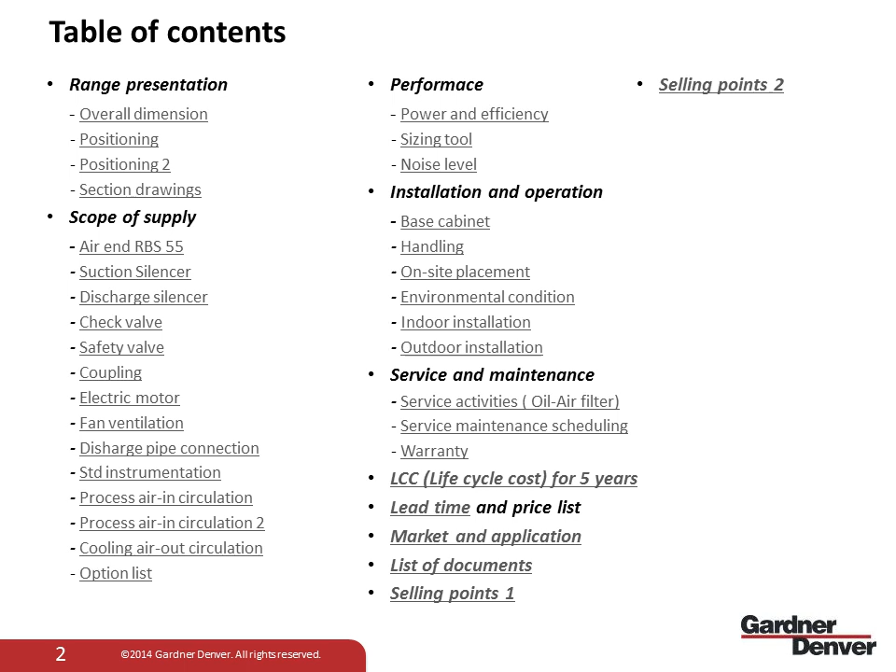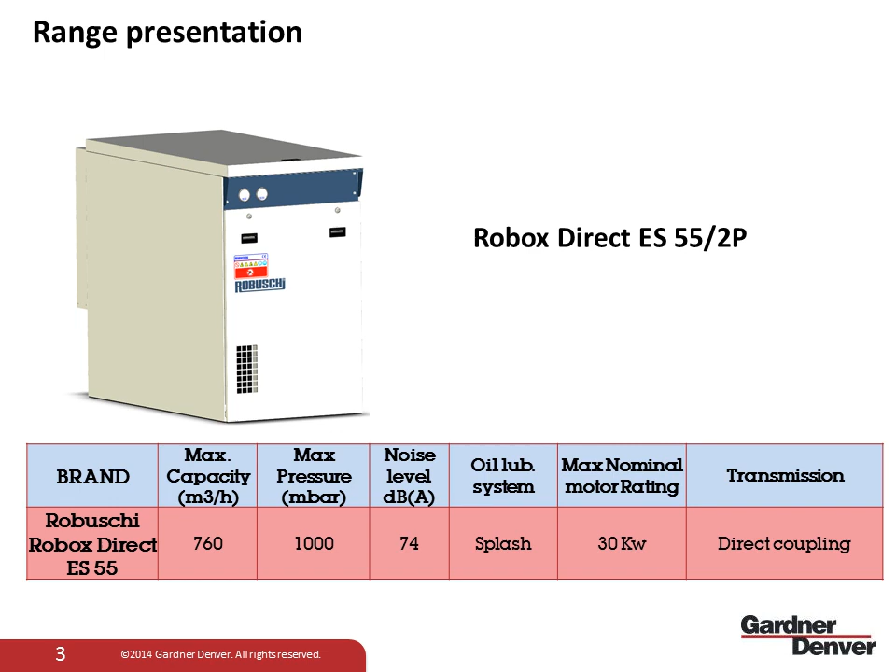First of all, the first slide shows the main key performance values of this product. We have one size, RBS 55, and you can see that the maximum capacity reachable is 760 cubic meters per hour at 1 bar maximum delta pressure. And the main differentiation compared to the standard lobe product is obviously the transmission, that in this case is direct coupling against the belt transmission.

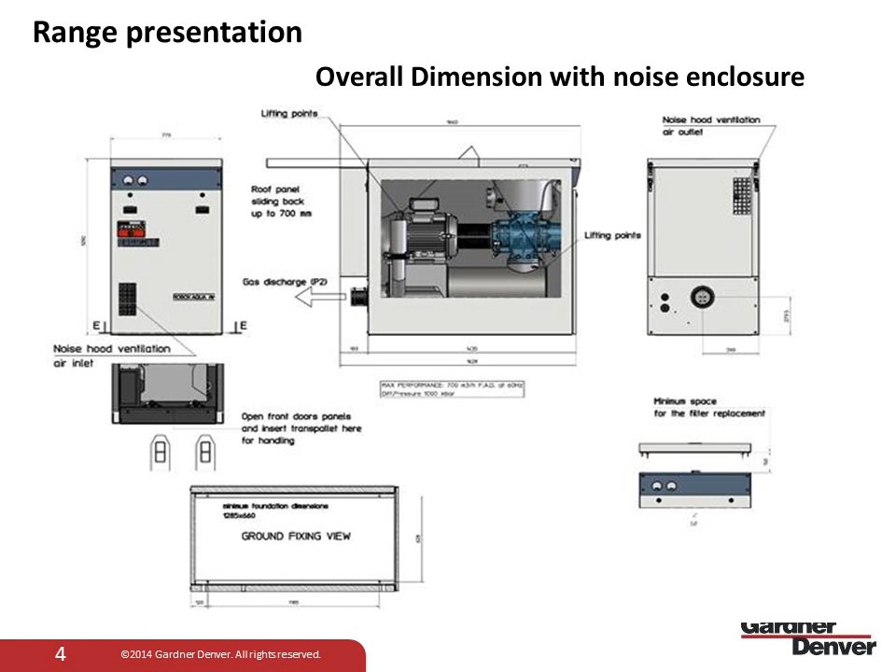This slide shows the complete info regarding the dimensions, including particular values, for example the minimum space for the filter replacement that you can see in this part of the slide, which we will see in detail later. But just to give you an overall dimension with noise enclosure. Same speech as the previous slide, but without noise enclosure. So you can see that this product is also available without noise enclosure.

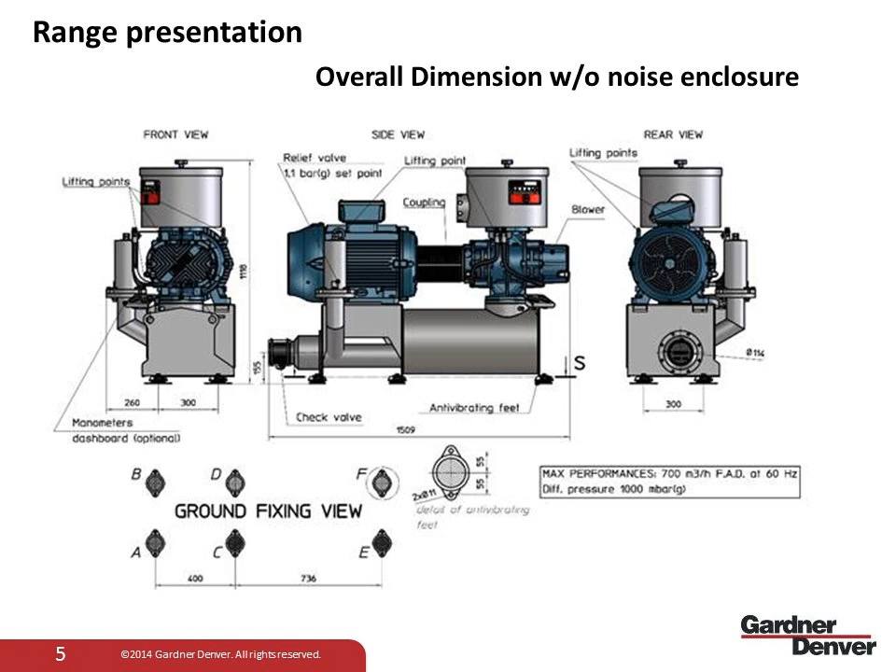Positioning. This is one of the main aspects on which we have focused and concentrated. So the footprint reduction, in order to give the customer more flexibility during installation, without removing positive aspects like the side-by-side installation, which is still one of the important features of this product. Said that, you can see also in the image in the slide that 4 Robox Direct units can fit the same space that we have with the standard Robuschi lobe, but with more capacity.

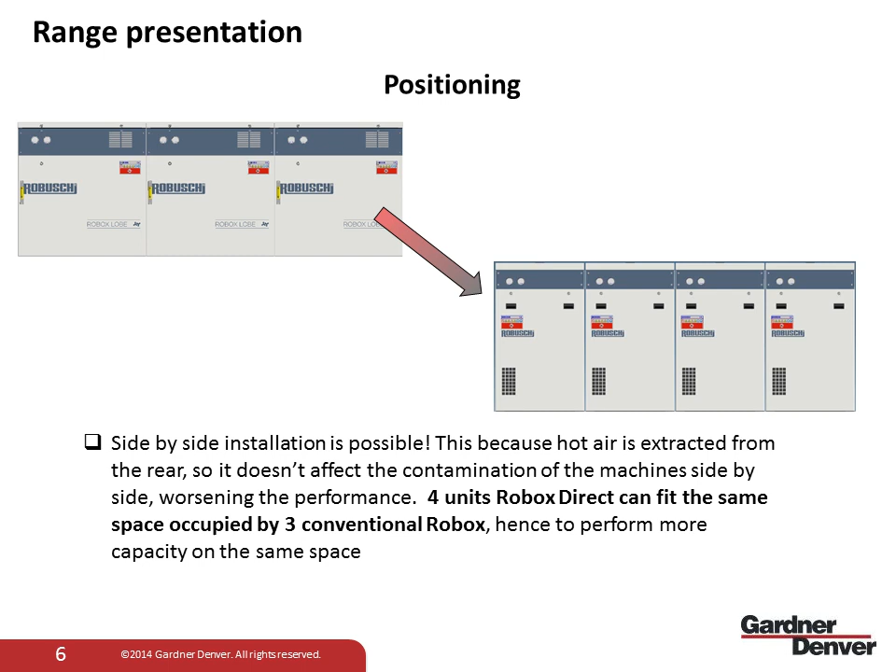Another important feature, in combination with what was said in the previous slide, is that thanks to the addition of the soundproofed base, which is an integral part of the machine, so it's in the standard scope of supply, this allows flexibility, such as the possibility of installation on upper levels. In this way, we can reduce the space requirement and consequently the compressor room size.

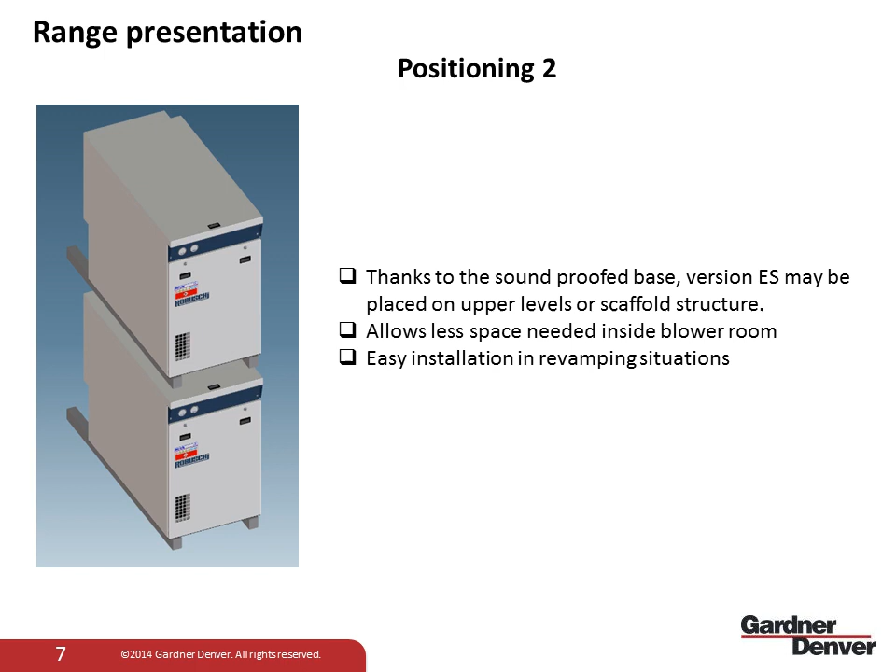Another slide, just to give you an overall view of the product, specifying the main parts of the noise enclosure. So there is a list of the total parts that compose the noise enclosure: the total panels, the front panels, the base, that is number one, etc.

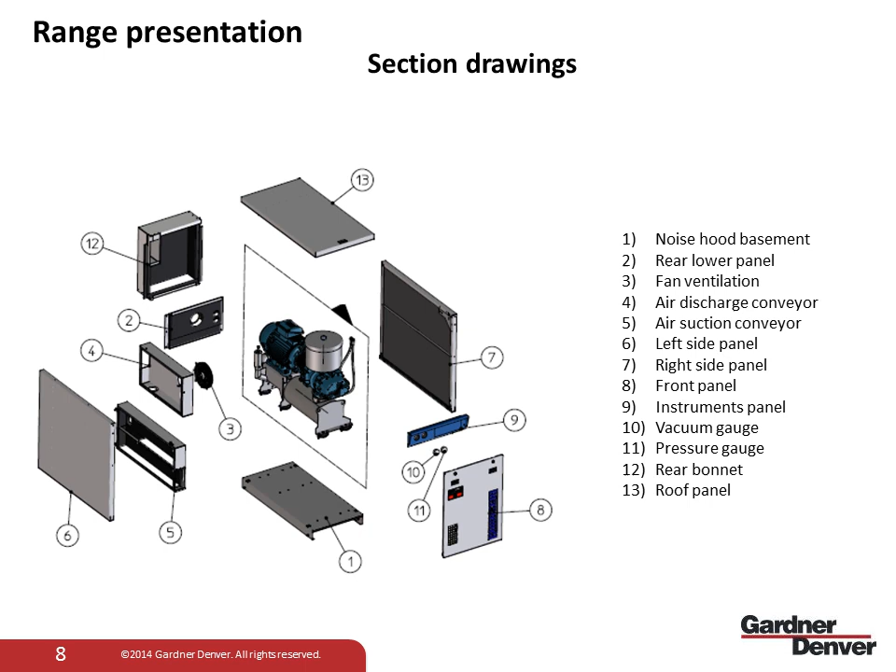Moving to the scope of supply, we start obviously from the air end, RBS 55. I guess that every one of you knows very well the Robuschi bare shaft, and for this reason, in the slide there is just listed a summary of the main features of this range, with the addition of one very important new entry in terms of features, that is the oil-free certification. Now we have the certification for all the Robuschi bare shaft range.

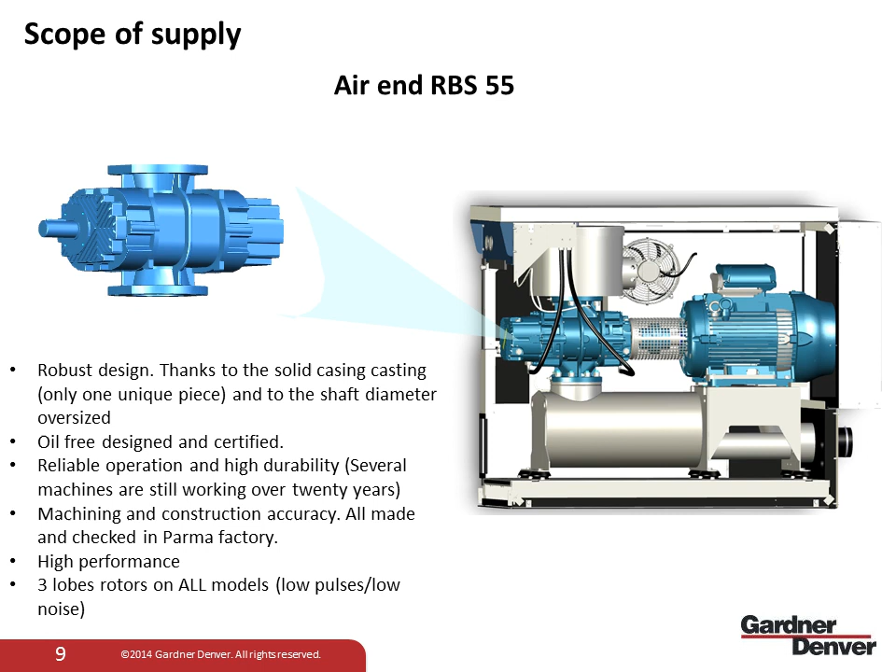About the suction silencer, we reused the same SPF that we used in the standard package due to the double function that this silencer gives, so the absorptive function and the reactive function. The reactive function is also patented, and ensures good noise reduction and filtration to avoid pollution in the blower. 93% efficiency on particles of 10 micron.

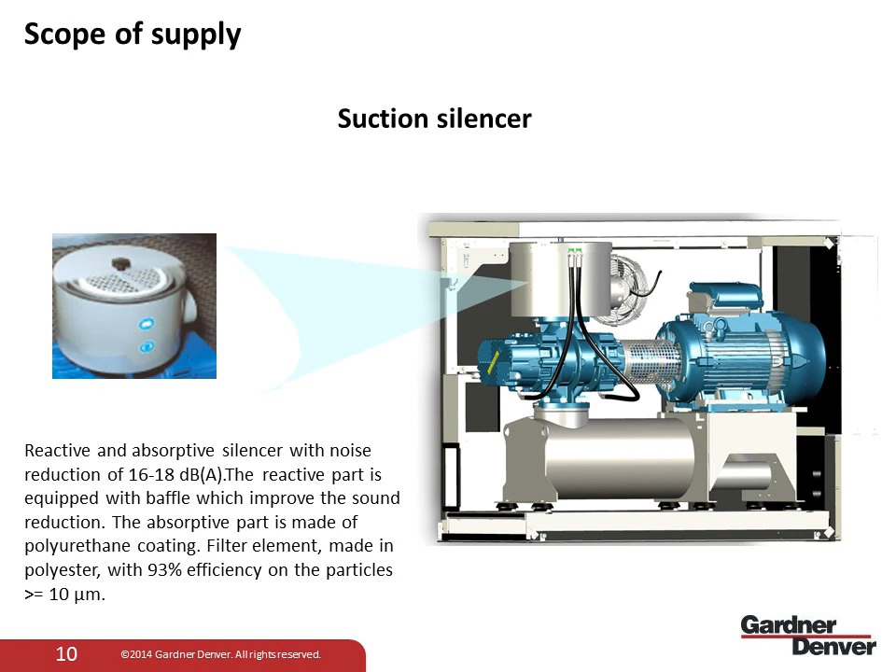Same speech about the discharge silencer. Also in this case, we have the same discharge silencer, which is only reactive. So thanks to the 3 resonance chambers with different volumes that we can see in the picture, this ensures a good attenuation of the noise.

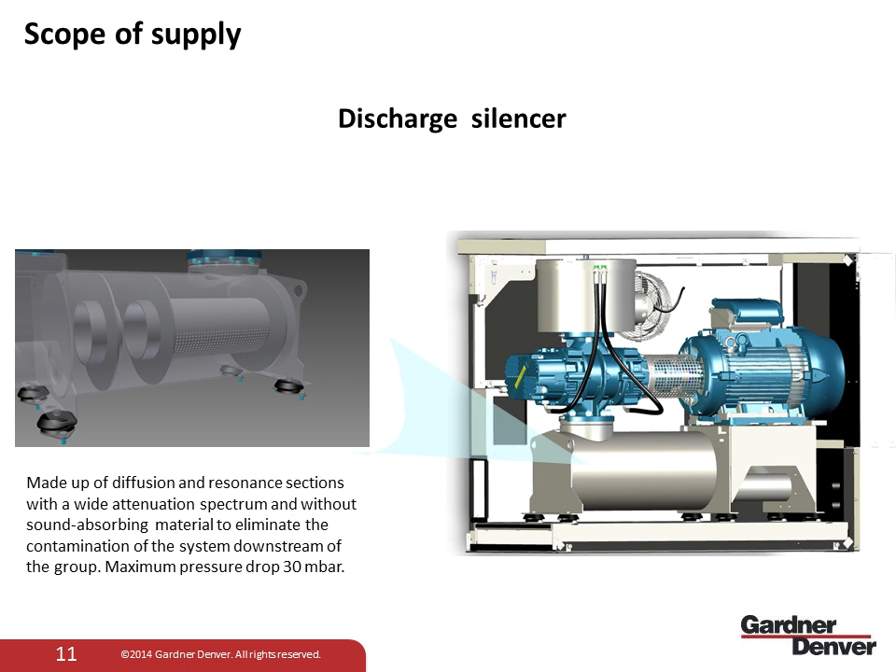Another important feature is the fact that the discharge silencer is anti-spark certified, thanks to the internal drilled pipe that acts as a flame arrestor. This is important for the customer and a very good benefit to prevent any kind of contamination of conveyed gas with the possibility of spark generation.

Okay, I saw just a first question by Reto. May the sound enclosure be retrofitted, similar to the other vendor? The answer is no, because this sound enclosure is specifically designed only for this type of package. The panels are a little bit different from the standard package, and for this reason the noise enclosure is specifically designed for this package. Thanks, Reto, for the question.

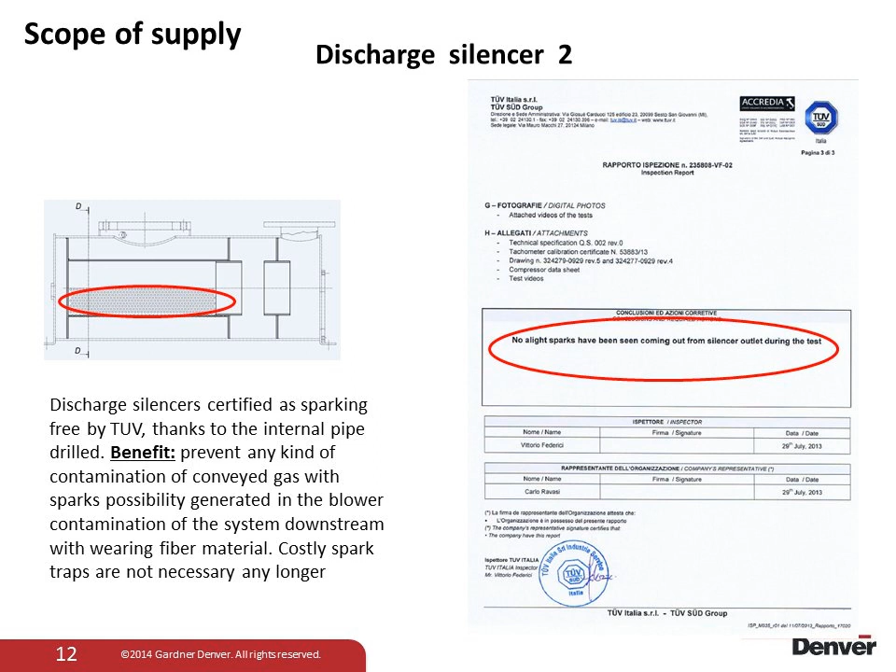Check valve. Also in terms of check valve, in terms of protection, we use the same component of the standard package. We use the check valve to protect the blower against reverse flow, with the same material and same construction.

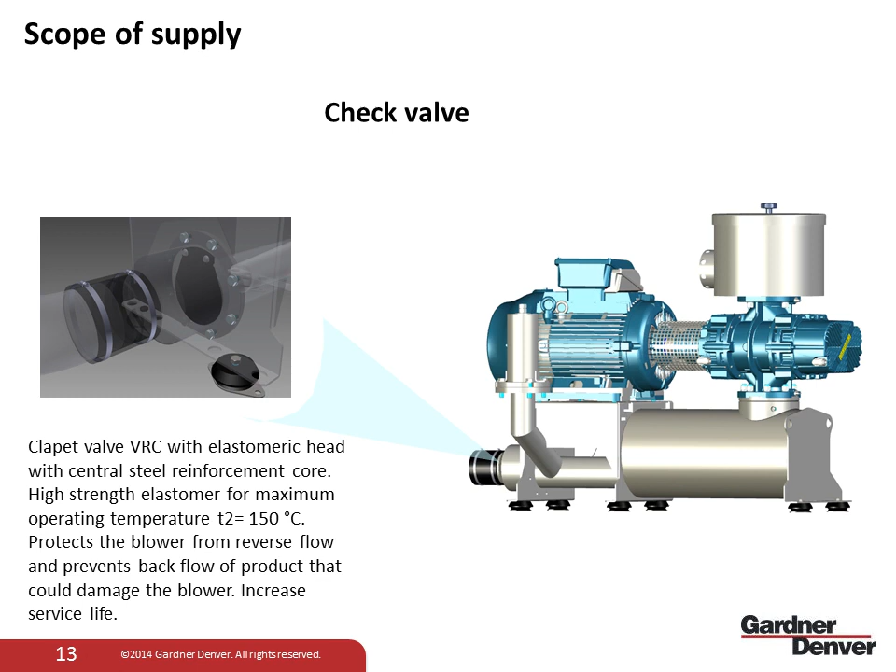About the safety valve, also in this case we use the same RVP valve, which is used only to protect the blower, not to protect the customer system. This is important to know. The valve is completely settable by Robuschi or by the customer itself. And we will see in which way to do this job, which is very easy for the customer. So we try to make this operation more comfortable.

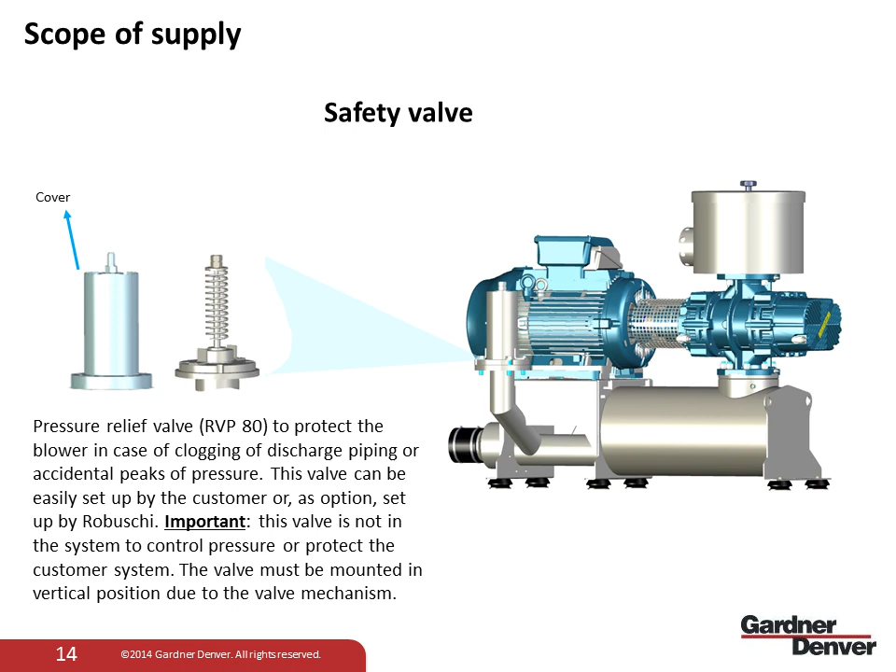In fact, this slide shows how to set the valve. As you can see, we studied a solution to make this operation easier for the customer, to save time and money.

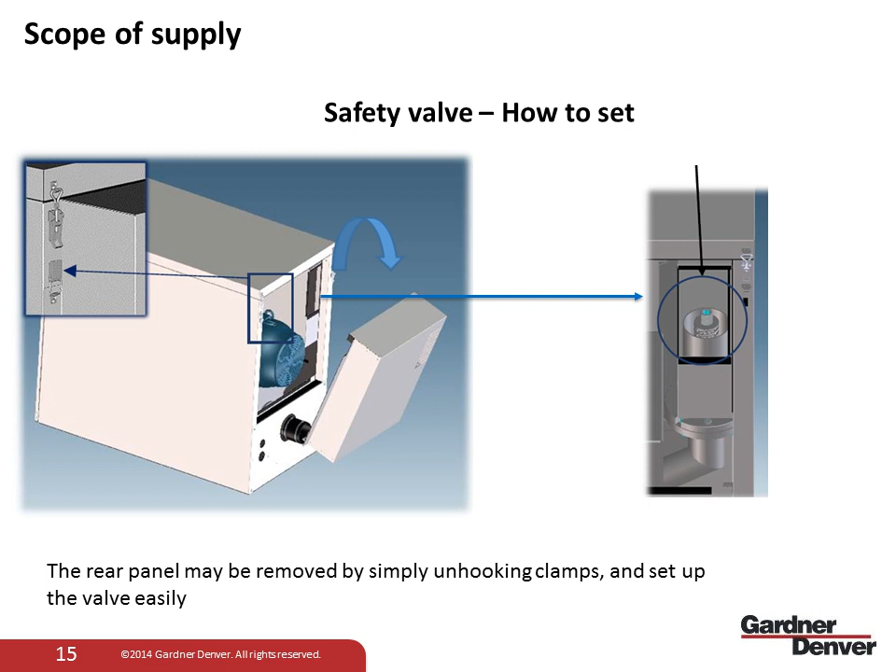This is one of the main differentiations compared to the standard package. We designed a dedicated plate for the motor, designed to fit two different sizes, 30 kilowatt and 22 kilowatt. And we have a standard coupling that ensures better efficiency for sure, and mostly less maintenance compared to the traditional system with transmission belts. Thanks to the absence of transmission belts, we have not only better efficiency, 100%, but also less cost in terms of maintenance, which we will see in a dedicated slide.

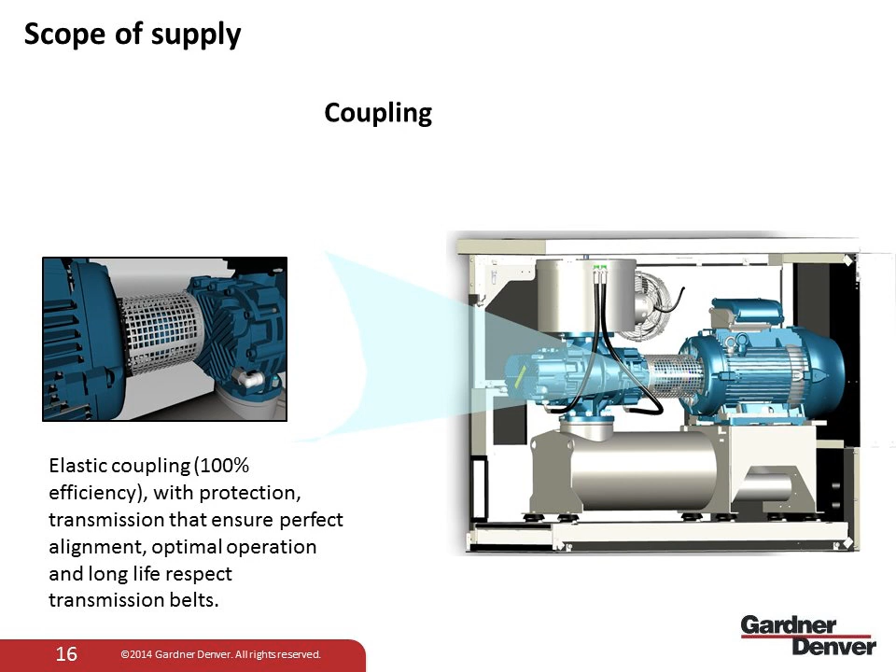About the electric motor, as I said before, we have considered only two powers, 30 kilowatt and 22 kilowatt, to match the performance that I showed at the beginning of the presentation. The motors are absolutely standard motors according to the IEC. The sizes are 180 and 200. And in this package, we can install these brands: Felm, ABB, and WEG.

But for sure, if a customer wants to install his own motor, I put the maximum admissible length for the 22 kilowatt and the 30 kilowatt. If the customer wants to fit his motor, it's important to know that we have some limits in terms of length, and this limit must be respected. Otherwise, it's impossible to fit other motors. And always speaking about the customer motor, it's important that it follows the IEC standard.

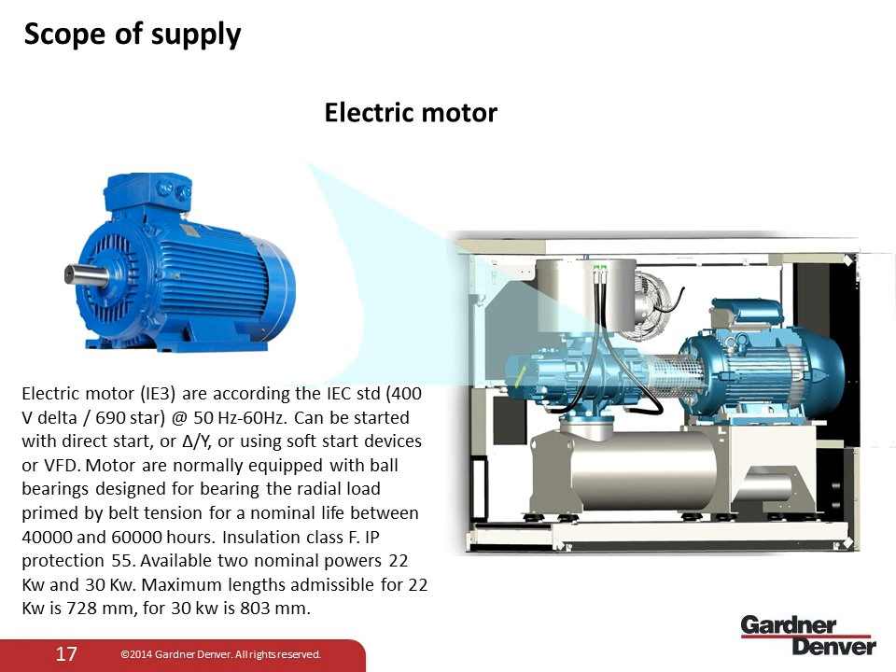In terms of fan ventilation, also in this case, we use the same as the standard package. So, a fan that ensures the extraction of hot air from the noise enclosure. And this ventilation fan is completed with the terminal box to make the connection easier for the customer.

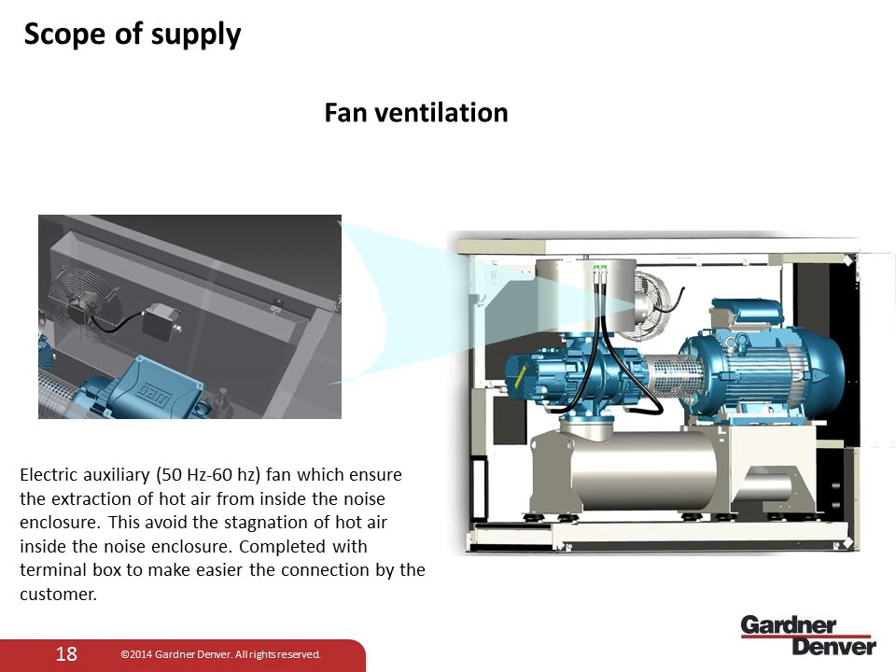The discharge pipe connection, also in this case, we use the same type, so as not to introduce a different system for the connection to the customer process, and also to have a quick and easy installation, also in case of revamping solutions. This is most important because we can easily replace an old blower or old package without any additional adapter.

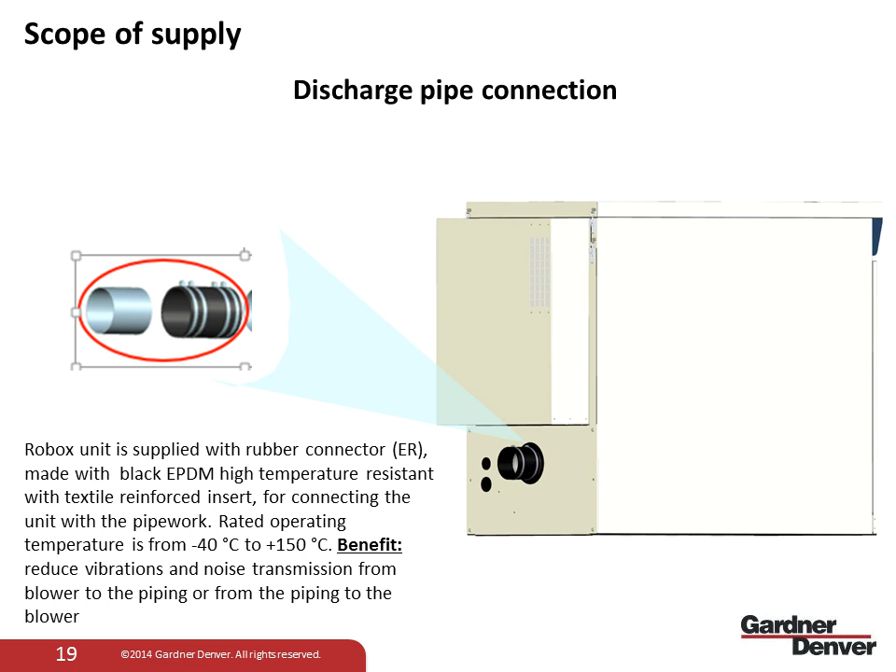Instrumentation for this product: we have just standard instrumentation, so the two pressure gauge and vacuum gauge to measure relative pressure and clogging on the filter. And nothing to add about this because they are the same as the standard product.

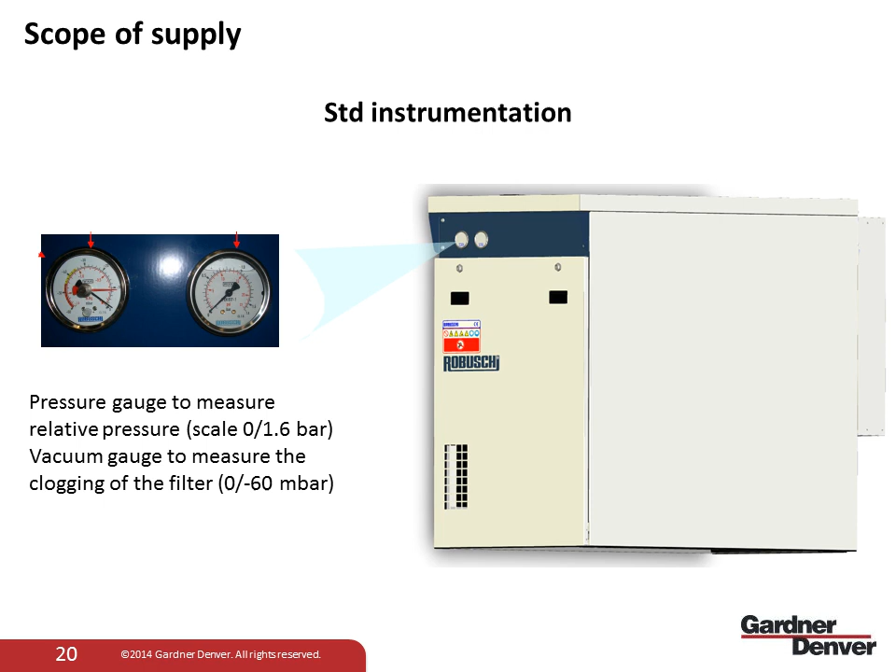Process air circulation. In this case, we have completely reviewed and restudied the process air circulation inside the package. Compared with the traditional lobe package, the fresh air inlet is on the front. You can see that in the front panel there is a specific grid that ensures the entrance of fresh air. And going through a specific conveyor, it goes first to the blower, ensuring better cooling of this main component, and then it's sucked in by the silencer.

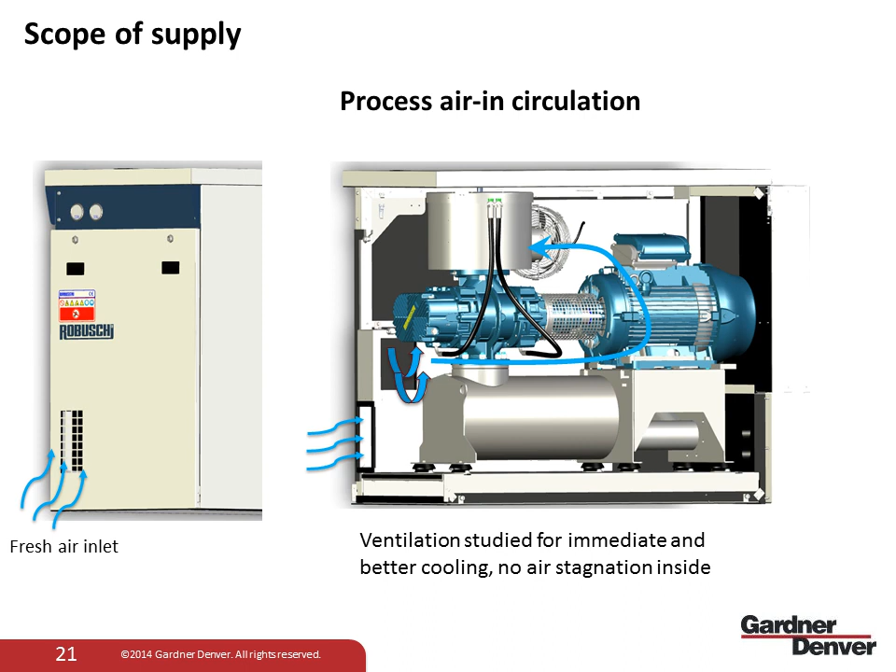These slides show better the inside suction conveyor with the specific flow path, and there is another window that is used for cooling the electric motor too. So this means that we studied a very good process air circulation that ensures better cooling of the two main components, which are obviously the blower and the electric motor.

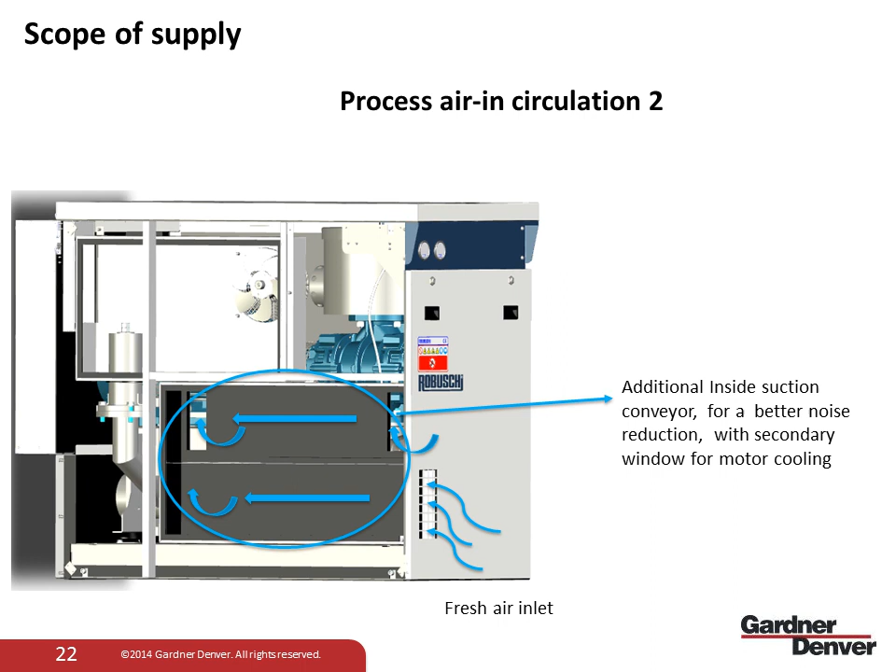Also, in terms of cooling air circulation, we have reviewed this and designed a specific exhaust conveyor that ensures the extraction of the hot air coming from the noise enclosure, and also the hot air coming from the safety valve if the valve opens. And despite a very compact design, we avoid any stagnation of hot air inside the noise enclosure.

And you can see that the hot air is exhausted on the rear part of the blower. So this means that also in case of side-by-side installation, there are no problems, because obviously the hot air going to the rear doesn't affect the other machine in a side-by-side installation.

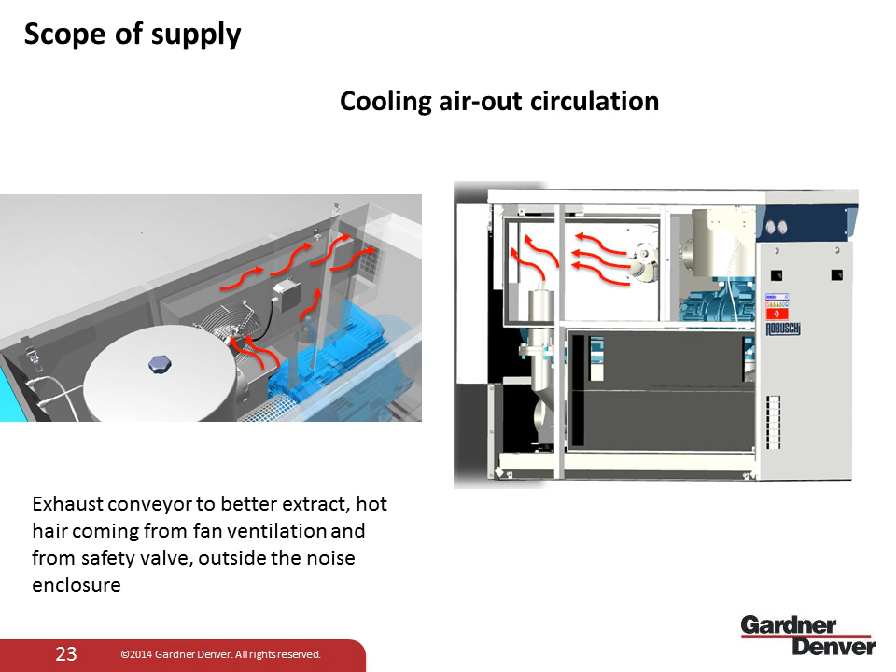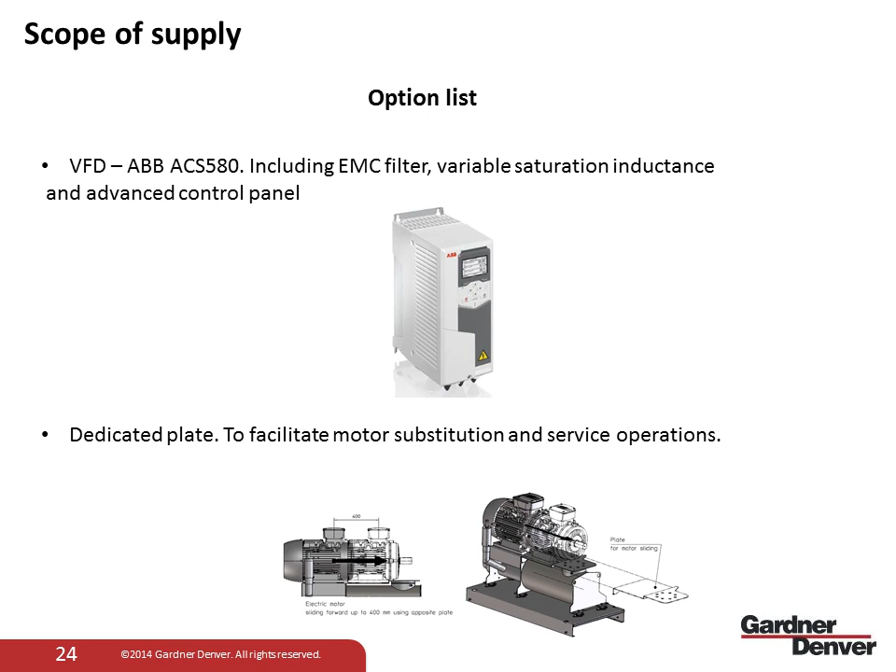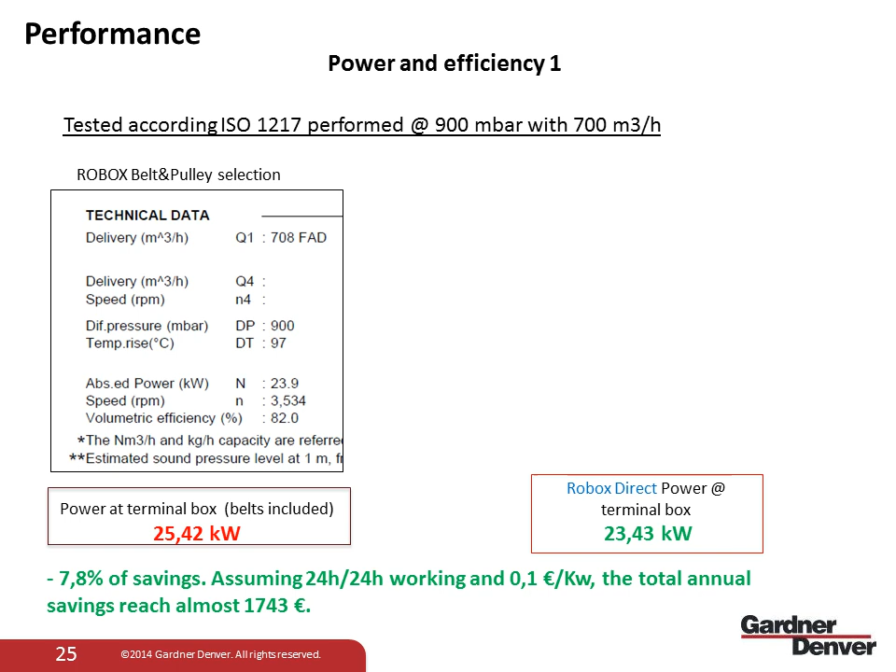That is a very good result, considering also the fact that we are comparing two similar technologies, because we are speaking about lobe technology. But thanks to the absence of the transmission belts, we can reach a very good result.

About the sizing tool, nothing will change, because we can use the same sizing tool that we use for the standard product, with the only difference that to select in the correct way, it's necessary to use not the standard ES-EL model, but the CRBS. That means blower direct coupling. But for the rest, it's completely the same tool.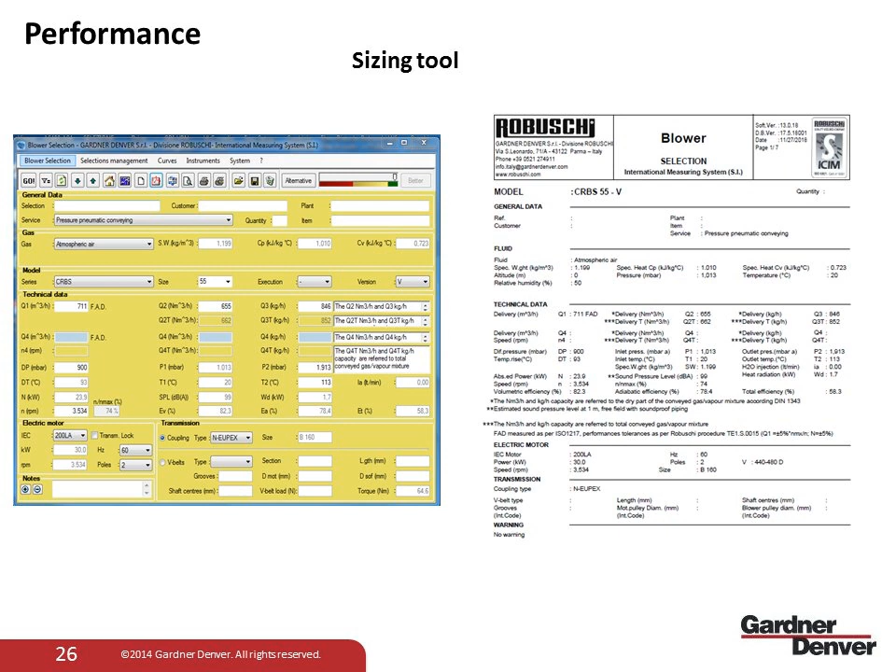Also about the noise, we did a lot of tests in our lab, performed according to ISO 3746, using the same performance condition, 900 millibar and 700 cubic meters per hour. And you can see that also in this case, we got very good results in terms of noise. So 74 dB(A), that's better, so very good silence despite a very compact design.

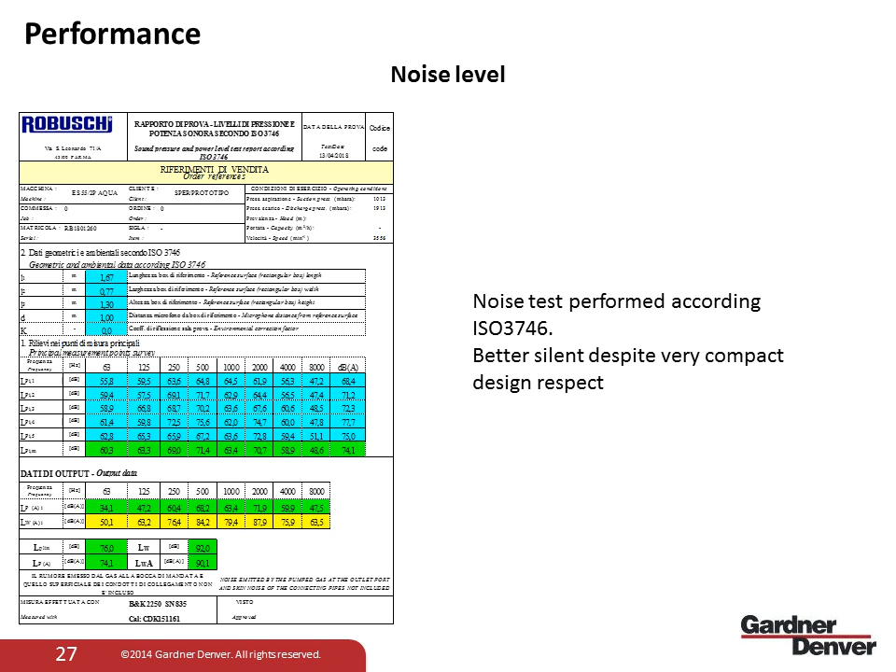Moving from installation to operation, I mentioned before the fact that in the standard scope of supply there is a closed base that not only ensures a good improvement in terms of noise, but also means we can have an easy rack installation, for example, in a scaffold structure. So this is something that is new, because our standard lobe, as you know, doesn't have any closed base, but in this case, there is.

And for sure, this is a key point for the customer, that gives benefit in terms of noise insulation and also in terms of easy installation in case the customer wants to install the package in a different way.

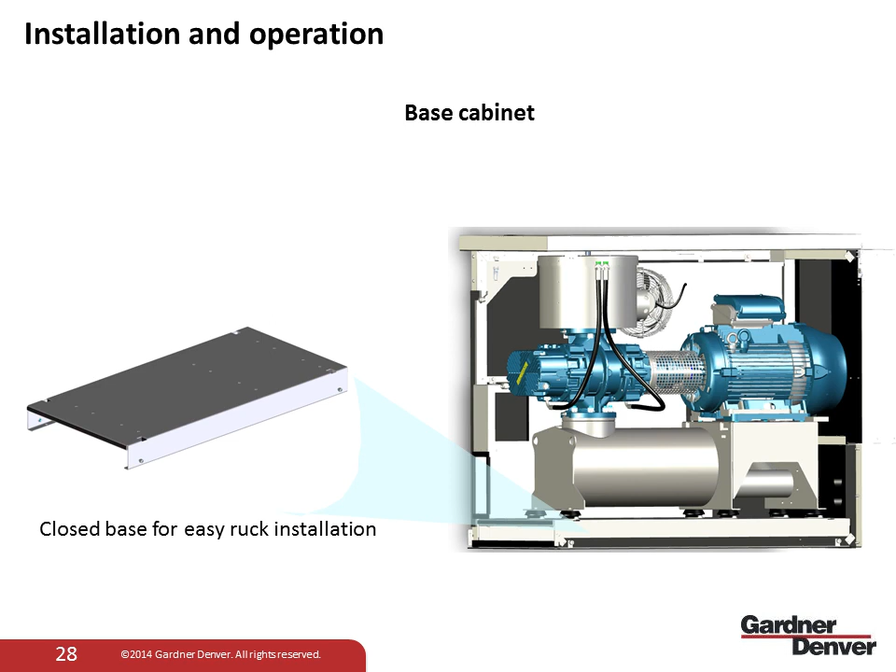In terms of handling, we can move the package in different ways. So if we want to move it at ground level, we can use a simple pallet truck, or if we want to move it to an upper level, we can use a lifting crane, because there are specific dedicated anchor bolts for moving. So this is just to say that we have studied this package considering also this aspect, which is very important for the customer.

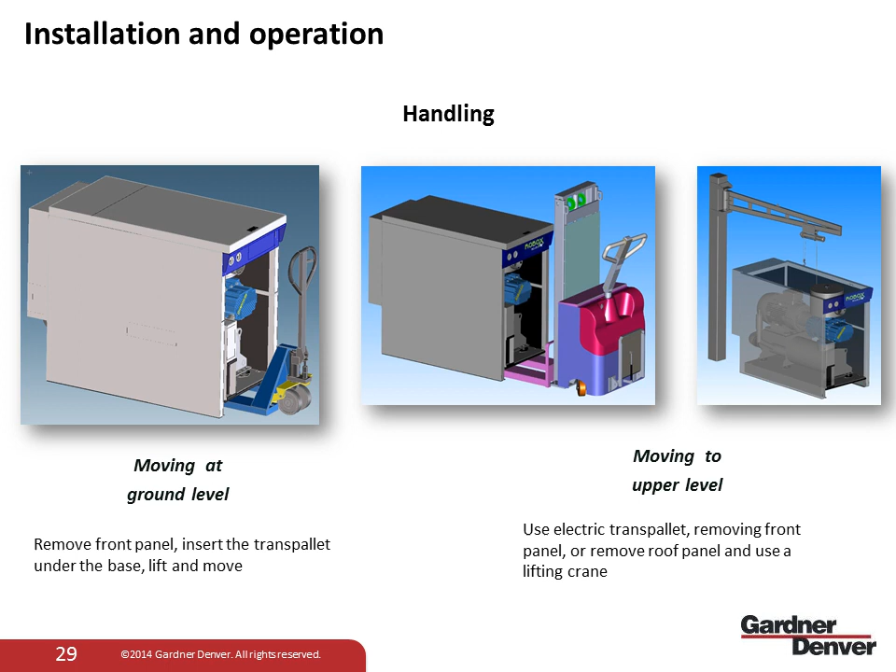Okay, this slide is just to give you some suggestions in terms of on-site placement, because it's possible for sure to lock the Robox to the ground, but it's not mandatory. And there are some details to have a correct anchoring on the ground.

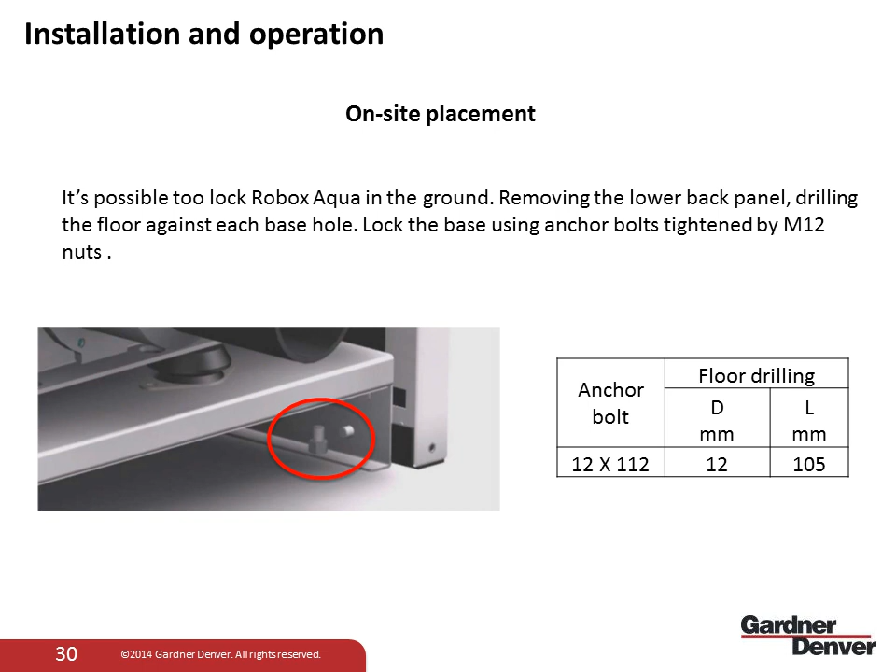Environmental condition. So Robox Direct, as you can see, is suitable only for air, dust-free environment for sure. The temperature range is between -20 and +40 Celsius degrees, and the installation is up to 1,000 meters. This is also important because this range is in accordance with the motor range, because obviously the blower can work also in different conditions in terms of altitude and temperature. But the important thing is the motor.

So if the machine must be installed in a different location with critical environmental conditions, it's better to come back to us, to Robuschi, to verify and check if the standard motor can be installed, because this is a key aspect for the thermal rating, an aspect that can happen when an electric motor is installed in a different condition from what I wrote in the slide.

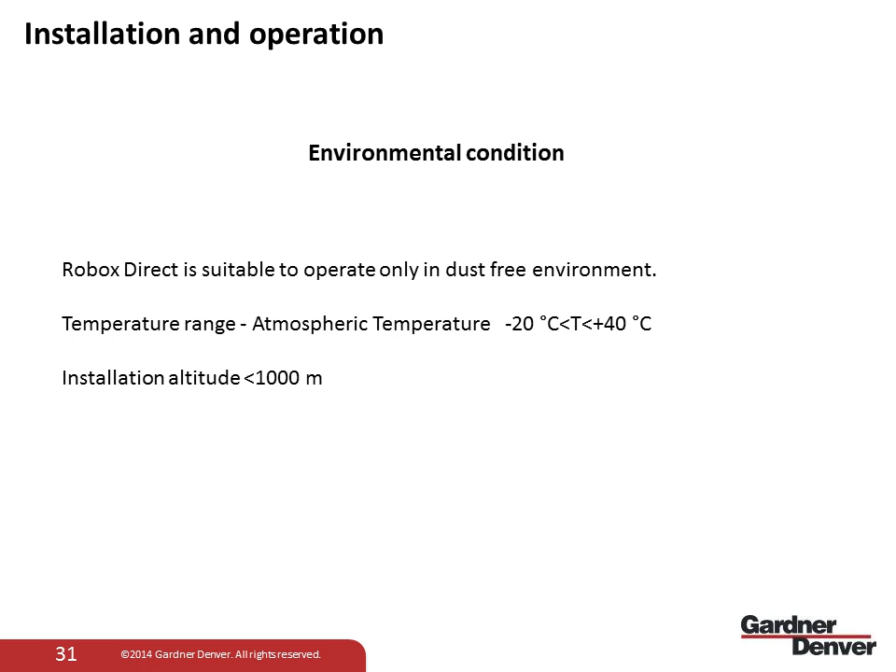In terms of indoor installation, this is just a generic scheme of how a compressor room should be, but it's not our care, it's customer care to have this, with an estimated calculation of the total extraction capacity of the ventilation fan that the customer has to put inside the blower room. It's necessary to guarantee very good air circulation inside the blower room.

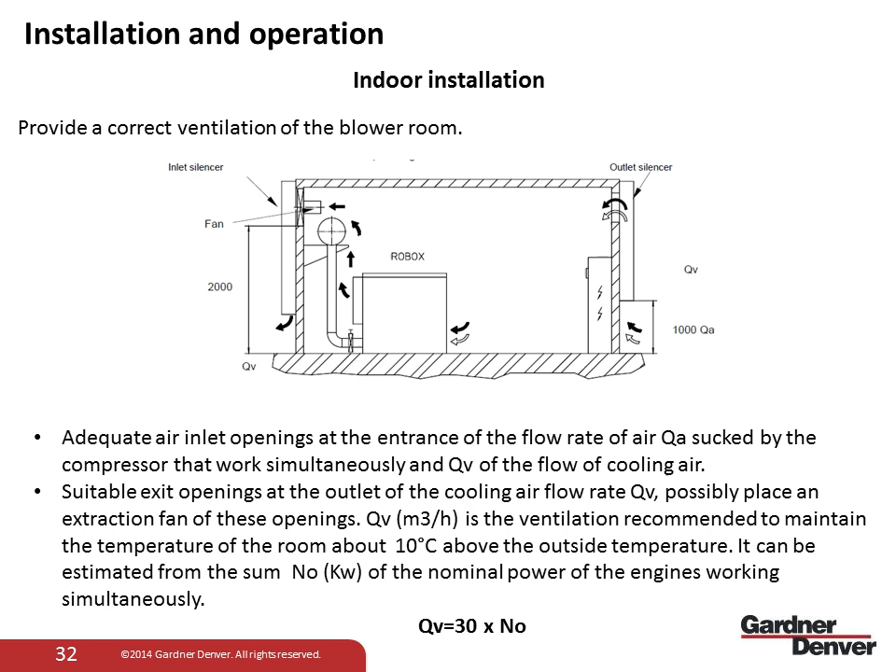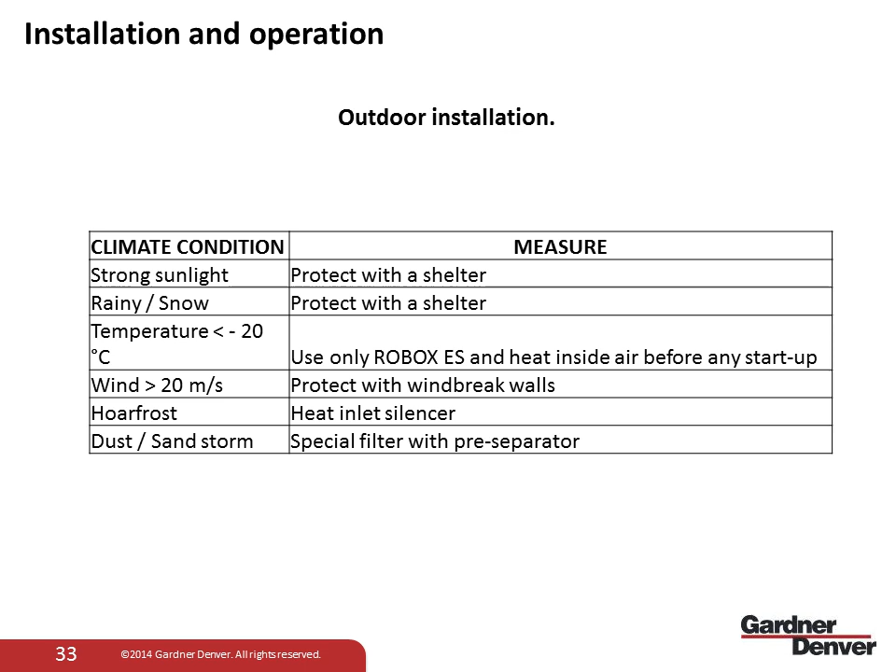Service and maintenance: this slide shows the main maintenance activities. One innovation is that for the suction filter replacement, it's no longer necessary to lift up the roof; in this product the roof can just slide, and this was thought to permit maintenance also when the machine is installed in a scaffold structure with limited space where it's not possible to lift up the roof. So this is an innovation we thought of for this product. For the rest, the maintenance activities are the same, and everything is possible thanks to the hatches on the front side, removing the front panel.

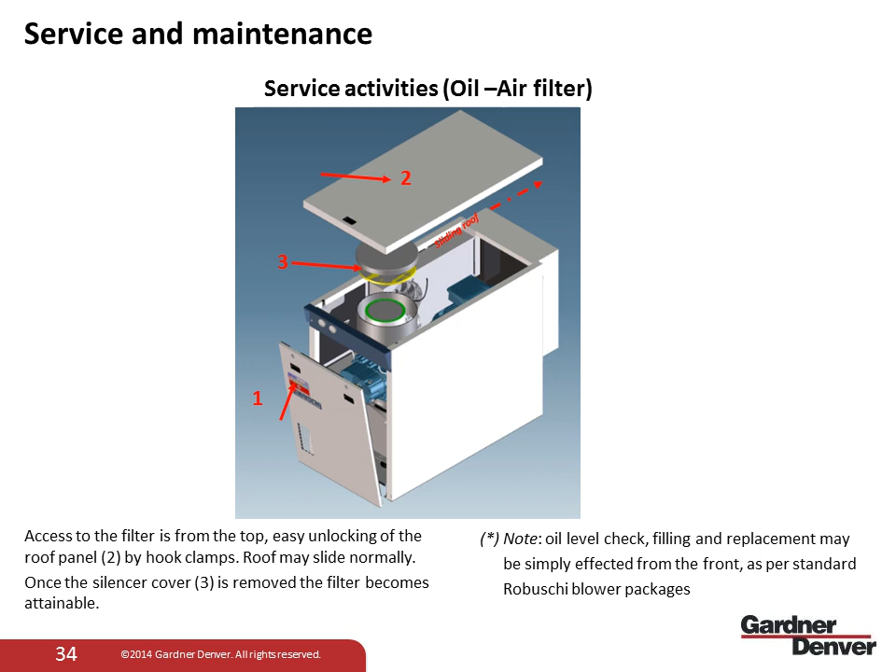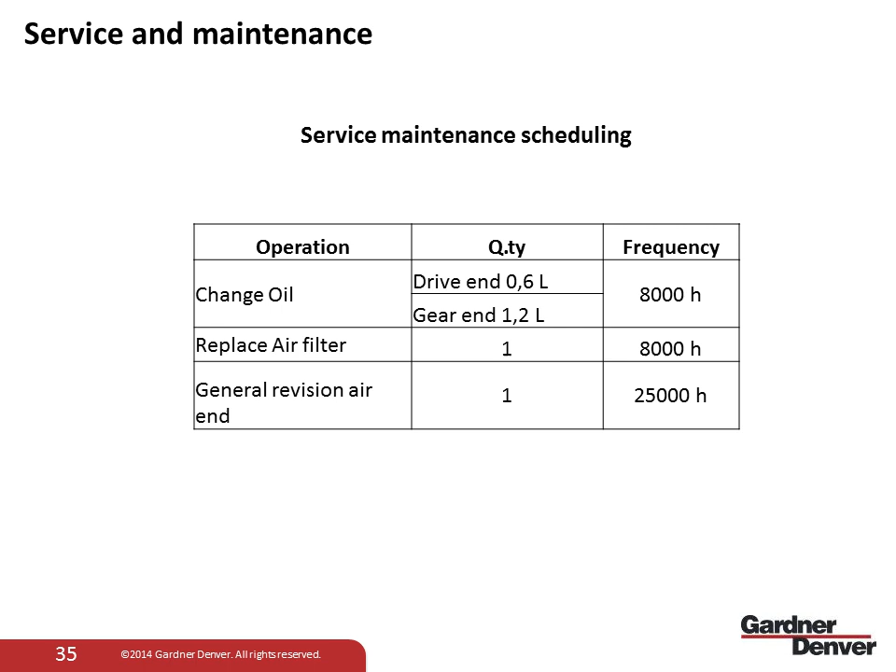This table shows the main service maintenance scheduling in terms of oil change and filter replacement. As you can see, there isn't any replacement of belts, and the general revision of the air end is identical to the standard package. In terms of warranty, it's a standard warranty of 12 months after commissioning or 18 months after shipment. So we follow the same as the standard package.

This slide shows a comparison between a standard Robox Lobe and Robox Direct at the same performance. You can see that even if the capex investment is higher, thanks to the better efficiency, the 8% saving we saw before, and the lower maintenance cost, the total life cycle cost is less, and we have a total saving in this case of 8,000 euro, and a very short payback. So this highlights that this product costs a little bit more, but this cost, thanks to the big advantages it brings to the customer, can easily be recovered thanks to a very short payback.

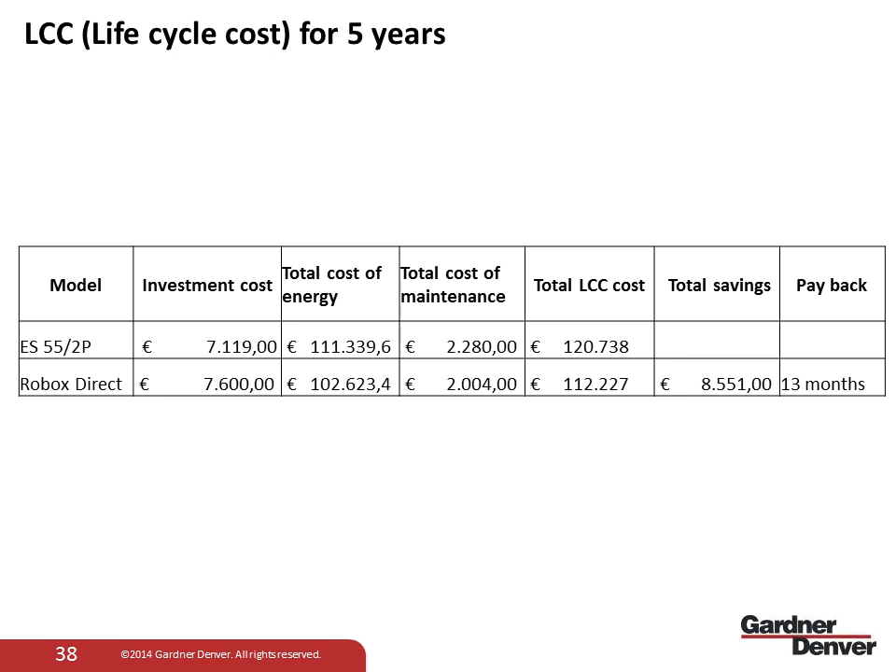Market and application. This is just a rough scheme of a wastewater treatment plant that shows where Robox Direct can be used. For example, in point 1, Robox Direct for air bubbles and oil separation system, in which the machine runs at fixed speed. Or in point 2, the oxidation system, in which, thanks to the inverter and modulation, it's important to guarantee the exact amount of oxygen in the tank, and also the filter backwash system, which is usually an application with start and stop, so intermittent functioning. So just to give you an idea in which applications, specifically for wastewater treatment, the Robox Direct can be used.

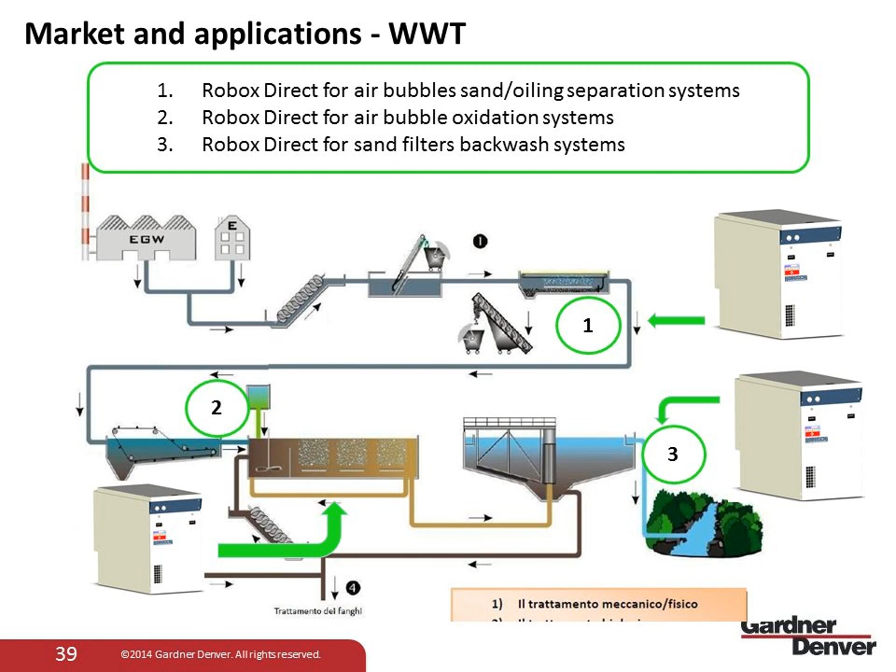This is another example in terms of pressure pneumatic conveying, showing where the Robox Direct can be used. For example, to convey cement or flour for the food industry. It's a generic scheme for pressure pneumatic conveying. So also in this case, Robox Direct can fit this type of application without problem.

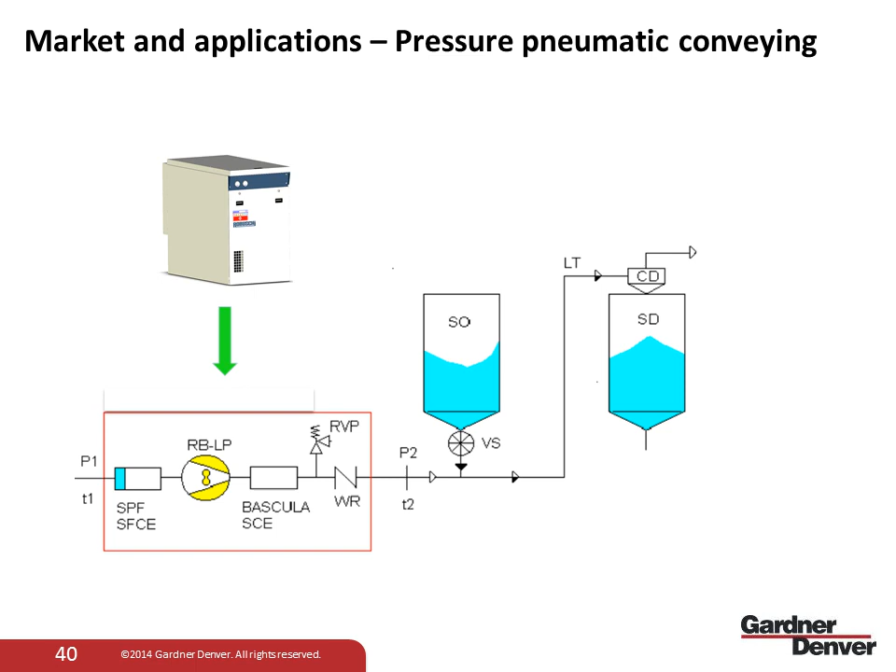List of documentation, just a list of the total documentation that we have uploaded in RepsNet. So we have the total technical specification, completely detailed, a dedicated operating and maintenance manual, a brochure for marketing aspect, the drawing, the P&ID, noise data sheet. So everything necessary for you to promote the product is available on RepsNet. If something is missing, please let me know, and I will revert.

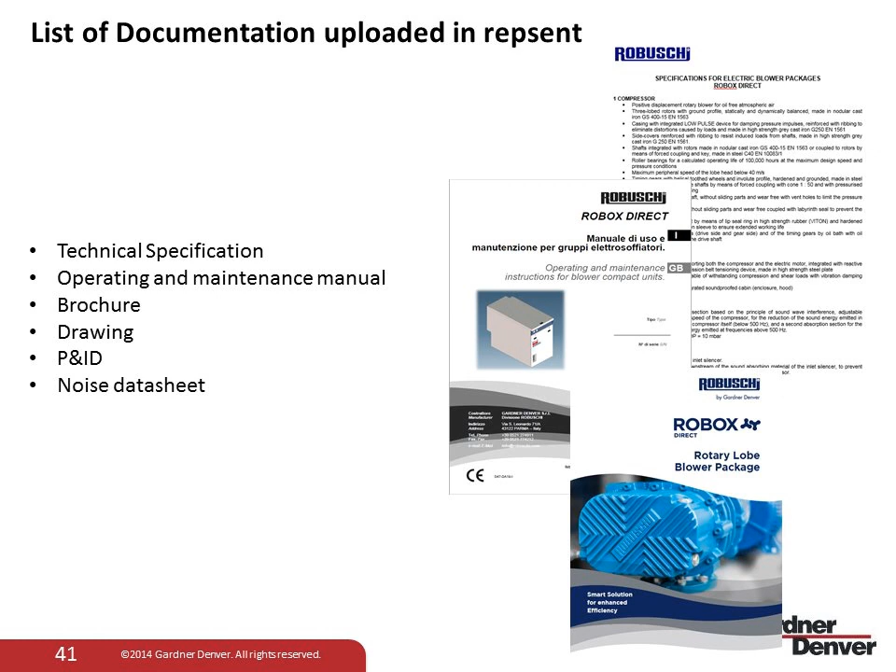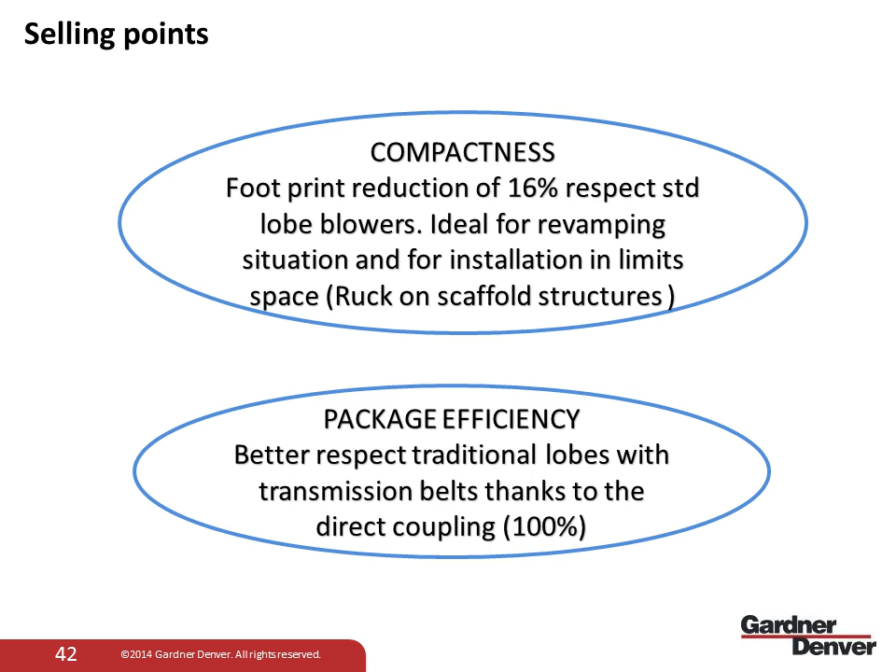Just a resume of the selling points of this product. First, it's the compactness, the footprint reduction, 16% respect to the standard lobe. So an ideal solution for revamping situations, thanks also to the fact that there is the possibility to have an installation on a scaffold structure. Package efficiency, better than the traditional lobe with transmission belts, thanks to the direct coupling, which ensures better efficiency. And last but not least, the ease of use and maintenance. Thanks to the absence of the transmission belts, this gives the customer more value in terms of cost and also in terms of time for maintenance activities.

Okay, the presentation is finished. So if you have any questions, we have some time to answer them.

There is a question by Reto: what's the warranty period on the coupling? I think you mean the scheduling in terms of maintenance. Depending on the operation condition, it's only necessary to verify the alignment of the coupling, not to replace anything, and this must be done every 3 or 4 years. As for a spare part kit, in terms of parts, there is only filter and oil replacement. Considering that the filter and oil are the same as we use in the Robox standard lobe, we can consider the same in terms of spare part kits. And for the blower, obviously it's the same because the blower is the same.